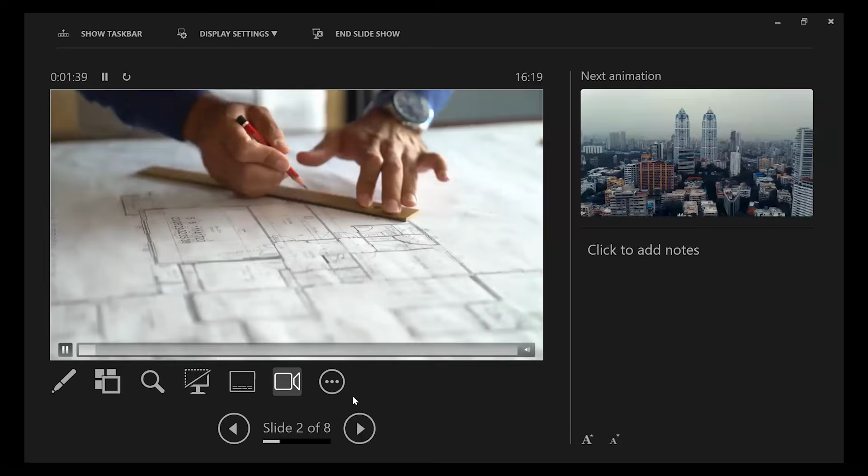Every building begins with a vision imagined by architects, created to inspire generations, designed to leave a lasting mark on the city's horizon. A building is an investment, a legacy, and every facade is expected to protect that legacy for decades. But time has its own plans.

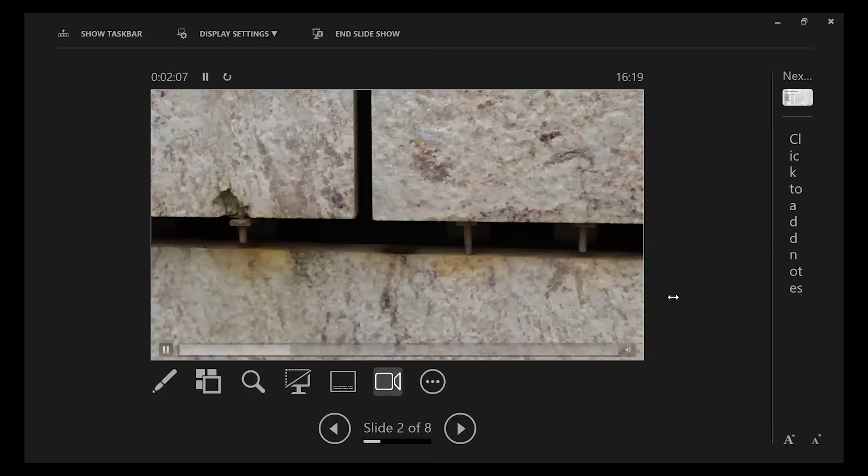Year after year, buildings endure relentless exposure to wind, rain, UV, pollution, and movement. Materials age, systems deteriorate, connections weaken, and often the warning signs remain unseen until they begin to affect the building and its occupants: water penetration, unwanted air infiltration, acoustic discomfort, condensation, material deterioration, disengaging facade elements, life safety concerns.

When a building envelope no longer performs as intended, the question is no longer what is happening. The question is why. This is where facade forensics begins.

Since 1997, we have helped building owners, asset managers, architects, and engineers solve complex building enclosure and facade challenges across more than 20 countries. We are the firm you call when your building envelope is not performing as promised, not with assumptions, but with investigation.

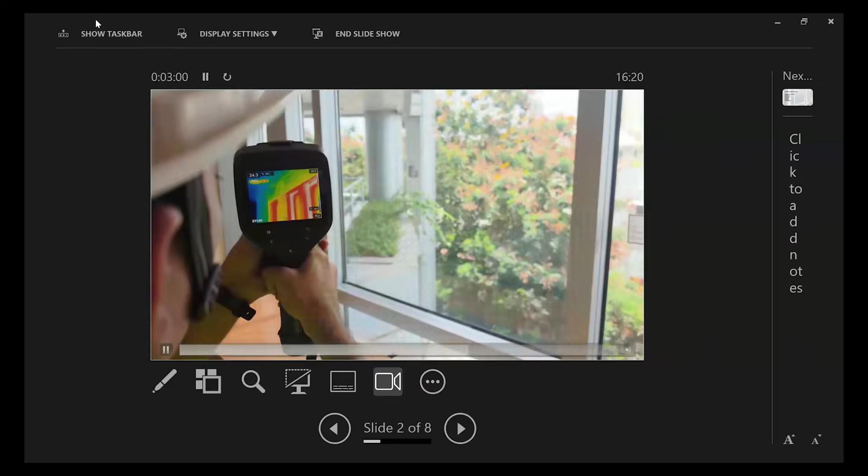Using advanced tracing technologies, we investigate facade failures with exceptional precision, identifying air and water penetrations within 12 millimeters for accurate diagnosis and targeted remediation.

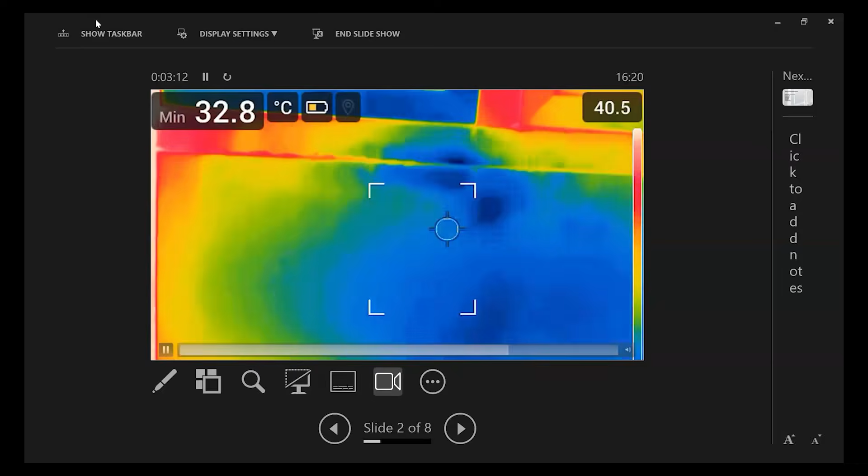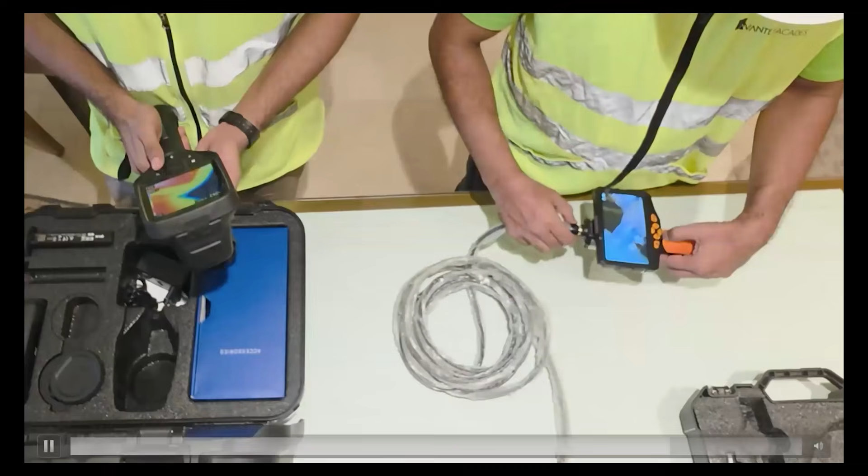Supported by a dedicated team of over 20 facade specialists, we combine field expertise and advanced diagnostics to uncover the true source of facade failures.

Because effective remediation begins with understanding the root cause, not simply treating its symptoms. Behind every facade is a team that sees what others don't.

So the topic today I've chosen is the facade, which is actually the external skin of the building. Nowadays you can see high-rise towers in residential, commercial, hospital, and hospitality buildings, and everywhere you can see architectural features in terms of the facade.

Facade is nothing but a combination of glass and aluminum frames, and depending on the operational area, there will be a vision facade and somewhere an opaque facade like cladding, stone cladding, ACP cladding, and other types of skins.

Now I'm going to draw your attention to understand, if this facade is directly exposed to the climate, what type of effect or defect will happen with this structure?

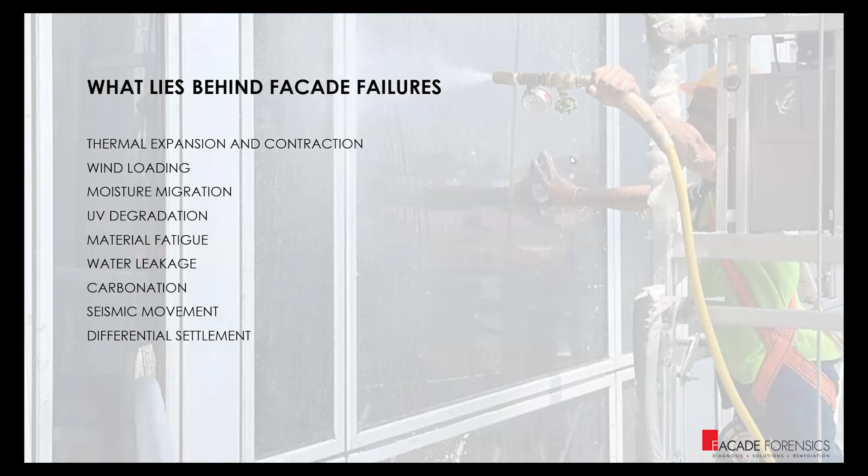So we are getting information from the building structures and their owners that there is a big challenge about humidity control. Even when we are using high performance facades at the start, after some time it starts to deteriorate.

Due to continuous aging, after some time, like 5 years or 7 years, we found that there is self-deterioration. Even if it is maintained properly, I can say the life of this structure itself deteriorates due to the period.

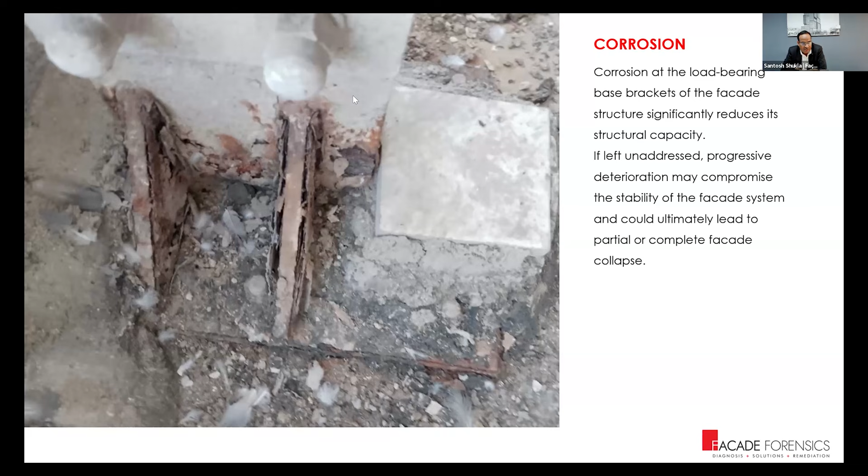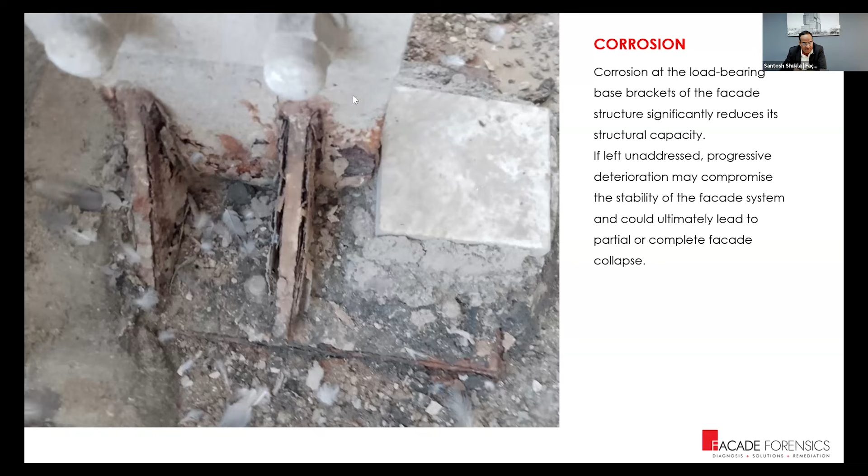So our concern with these structures, being a facade forensic expert, I would like to show some other features also. Another reason which is very common nowadays.

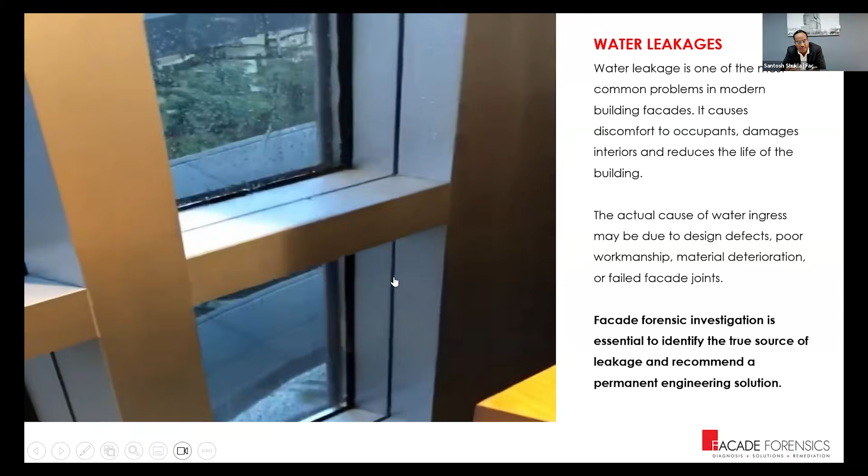You can see this one of the residential buildings where water leakage is happening very heavily due to the rainfall, and the occupants are completely upset about how we can restore the quality and performance of the facade.

So in that case, we insist to the facade industry and the building structures, whether it's the architect, the client, or facade contractors, that they should first investigate the facade, which is the external side, and then thereafter the civil structures also, which is the principal component of the structure.

There is a differential movement between these two elements, two structures, I would say. This is very much scientific to understand — it's not common knowledge that any resident or buyer can understand. So it's a requirement to have a scientific investigation and then come with an engineered solution for long-term sustainability.

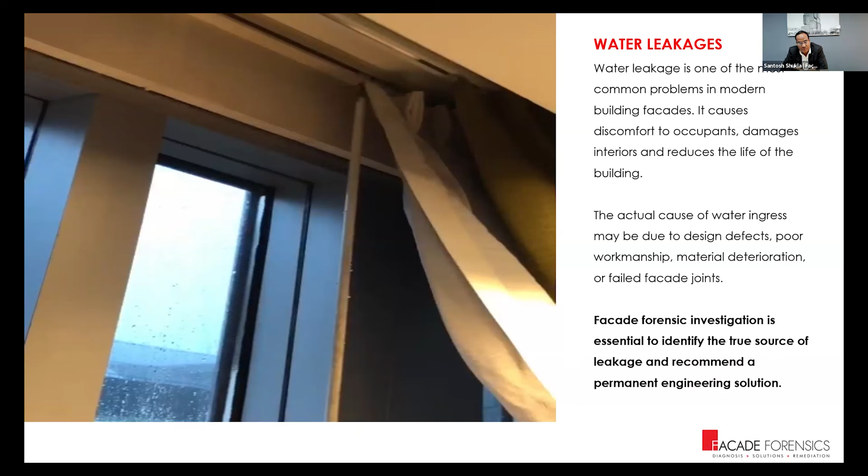Then thereafter, even if this is not facade but you talk about the building — this cladding part where the building is opaque, behind that nobody can see this type of deterioration which is happening due to prolonged water leakage, humidity, and not maintaining these facade elements.

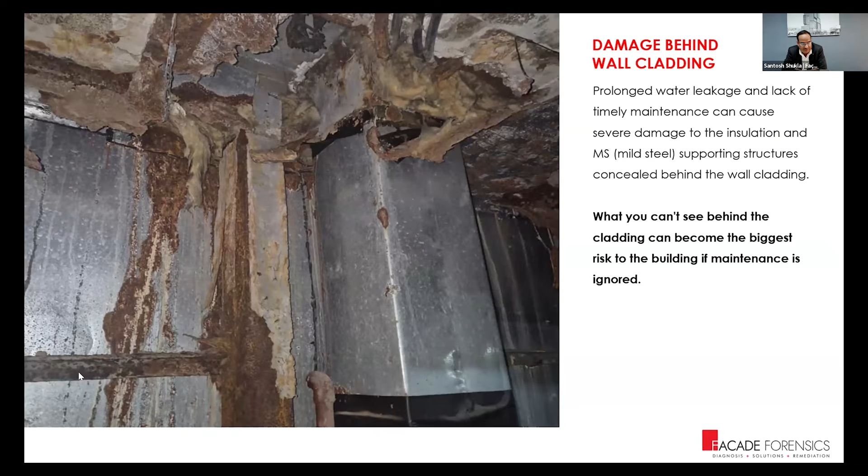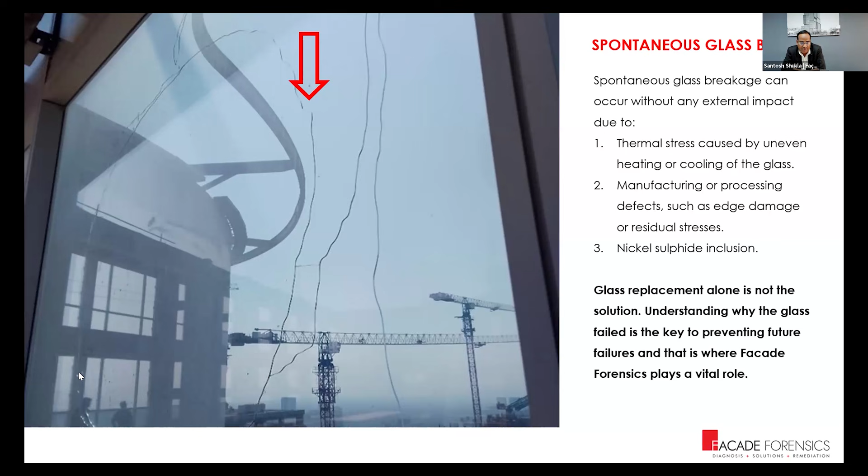No one would like to have this type of facade if it is non-engineered — even if it is designed properly, due to aging and workmanship, this type of problem can occur in the facade.

For the team, I would like to give my another introduction. I am a lead auditor of ISO 17025 for the facade, as well as OHSAS 14001 and 18001. Also, I am involved in the National Building Code 2026 for the glass and glazing section, which is Part 6.

Currently, I am working on the BIS standard for facade testing and to maintain the facade for the long term. There will be a codal provision from the Government of India that will be published soon, in the next 6 months I hope, and we are trying to create more awareness programs to help people understand how we have to maintain building facades. Thank you so much.